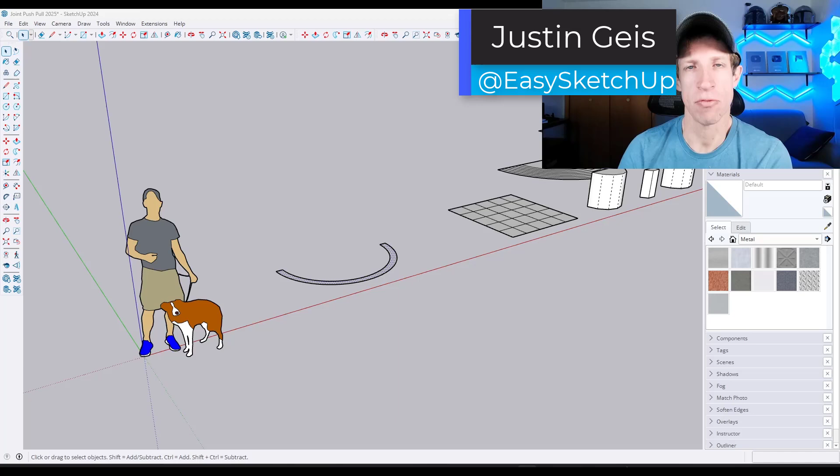In today's video we're going to talk about everything you need to know to get started with joint push-pull, the best tool for push-pulling curved and complex surfaces in SketchUp. Let's go ahead and jump into it.

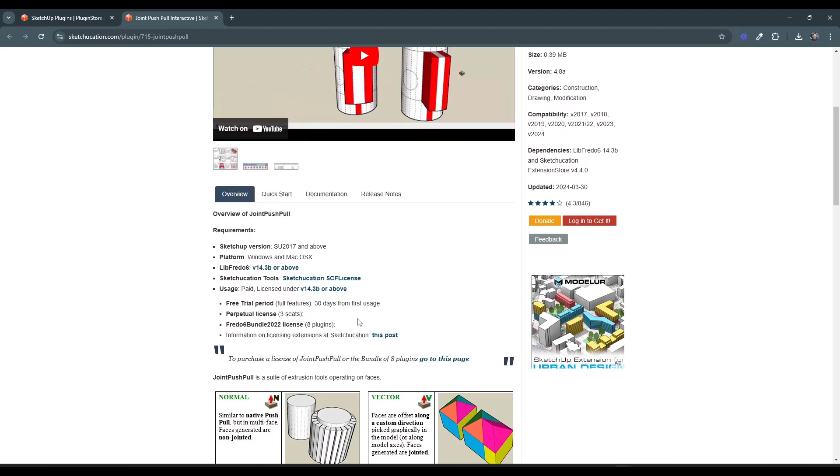You can get joint push-pull from Sketchucation, I'll link to this in the notes below. Note that we're looking for Joint Push-Pull Interactive by Fredo6. This is a paid extension now, so you can either download it individually or download it as part of Fredo6's bundle, which is usually what I recommend because the bundle gives you access to not only joint push-pull, which is great for push-pulling curved surfaces, but his other tool sets like CurveLoft, TopoShaper, Tools on Surface, which allows you to draw on complex surfaces, that kind of thing. So if you can, it's a one-time payment to download all of those. That's usually what I recommend, but you can download this one as well.

Joint push-pull is a tool for push-pulling curved surfaces. Really, when you dive into it, it's kind of a tool for push-pulling multiple surfaces as well. But let's hop over into SketchUp and take a look at the way that this works.

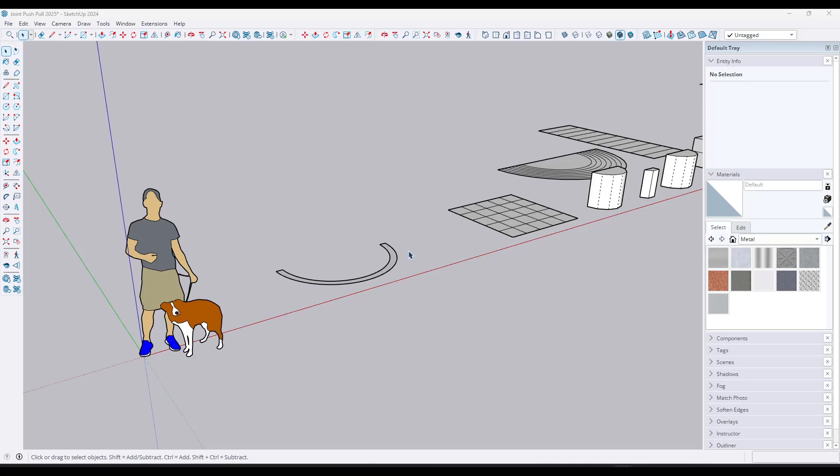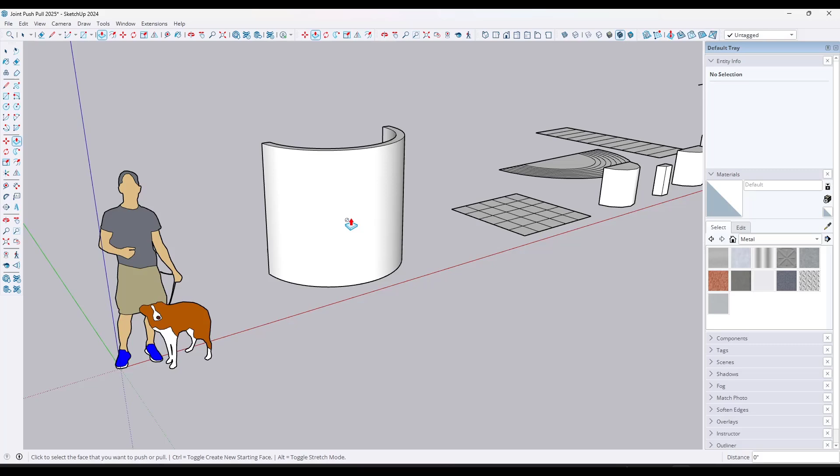First off, the reason we need joint push-pull is if you've ever had a curved surface like this one—I'm going to toggle my hidden geometry off—and tried to push-pull it, you're probably familiar with this message: cannot push-pull curved or smooth surfaces. For simple modeling that's not a big deal, but for more complex modeling, a lot of the time you do want to add thickness to more complex surfaces. That's where joint push-pull comes in.

One other thing to note: when you install one of Fredo6's extensions, you also need to make sure you've downloaded LibFredo and installed that as well. LibFredo is basically just Fredo6's library of different things that his extensions reference. You're going to need that or you'll get an error message. That one you can download for free—you don't need to pay for it.

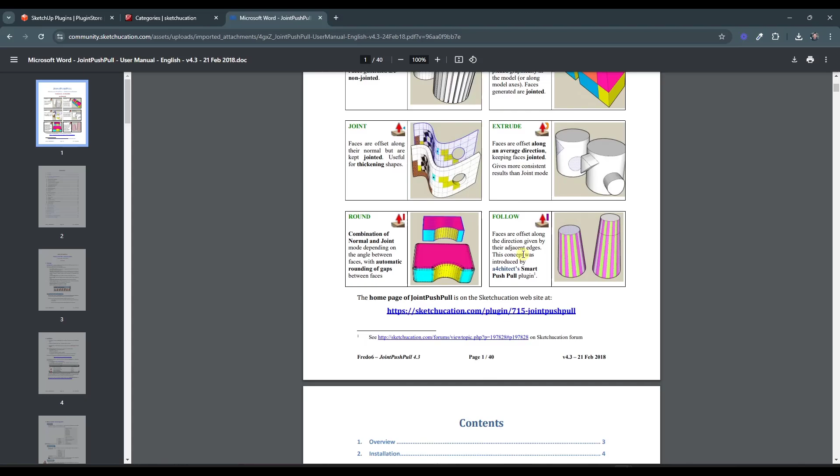From this page right here, note that there is a documentation tab, however this link doesn't really work for me. But if you go into the forum post about Joint Push-Pull Interactive, which I can link to below, there's a link in there to the documentation, right here. You can click on this link to view the newest version of the documentation. Note that this is a little outdated, but it gives you an idea of what the tools do—they haven't really changed that much since this was written.

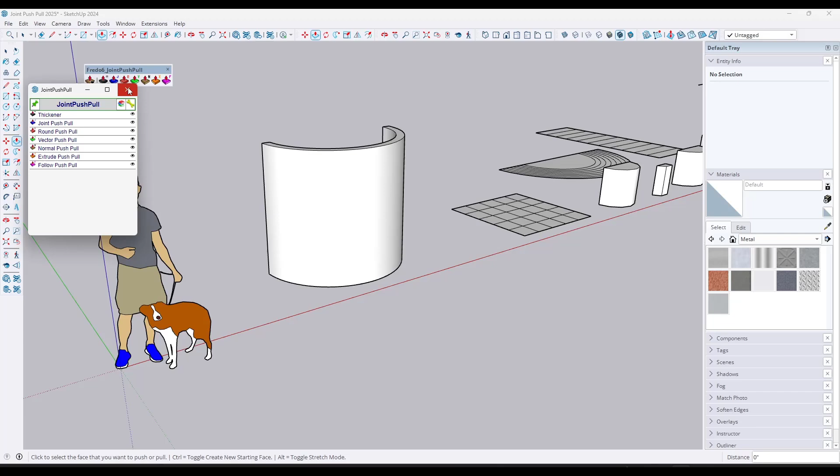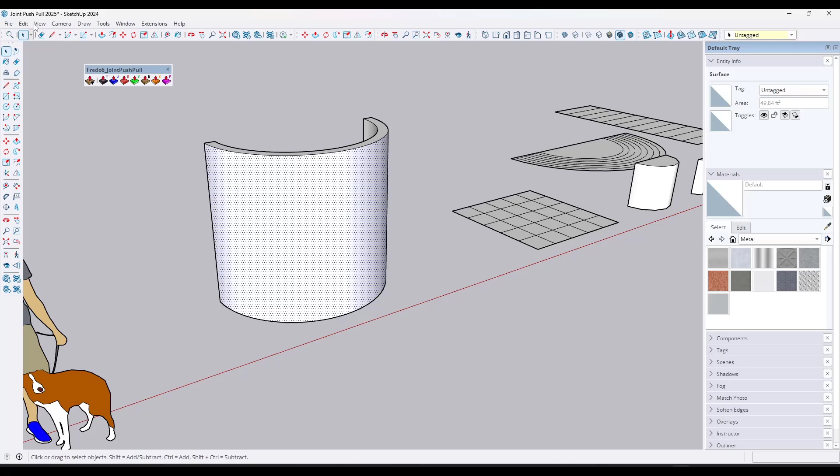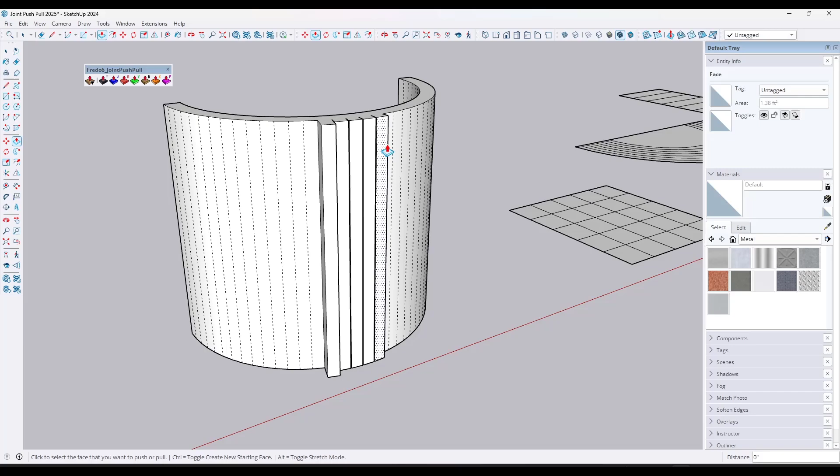In general, the point of joint push-pull is you can use it to extrude curved surfaces. If I use the joint push-pull function like this, it's going to allow you to push-pull that curved surface. Fundamentally, the reason you need an extension for this is the way SketchUp displays a surface like this is actually making up a curved surface by smoothing a bunch of flat surfaces. If you go into your hidden geometry, notice how this surface isn't actually curved—it's a bunch of singular surfaces. If we were to come in here and push-pull these individually, notice the problem is because they're all individual faces, they push-pull out and don't really merge together. So what joint push-pull does is set this up where it does automatic merging of those surfaces so that they become just a simple push-pulled surface like this.

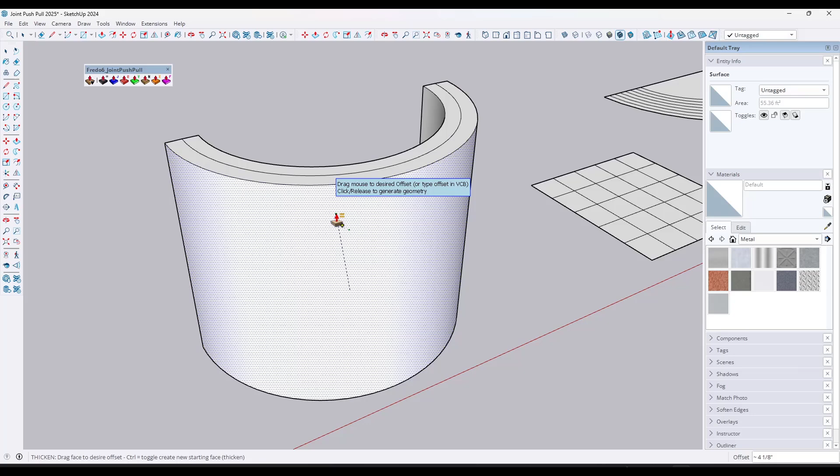Now, the first option is the thickener. All the thickener does is it's a tool designed to allow you to thicken a surface in SketchUp. It's supposed to be the simplest way to do this—it's basically just a push-pull tool that thickens a surface, that's all it does.

Notice how it's creating new surfaces right here. I don't use this one very much because a lot of the time I need to customize the way that the tool is going to work. So probably the tool that I use the most, depending on what I'm trying to do, is this first option, this blue option, which is just the simple joint push-pull.

When you click on the joint push-pull right here, notice how it's going to pop up a menu that looks like this. For you, it might start off looking different. There's a 3 arrow icon you can click on to get additional options. I pretty much always have that maximized, not minimized.

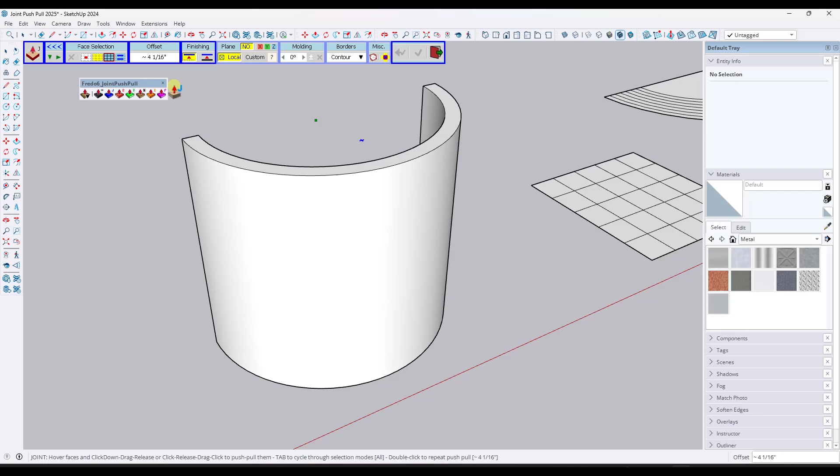There's a few different face selection options in here. I usually just leave this on surface. I don't really want this on all connected faces, because if I do, notice how it's selecting everything, and it's going to push-pull everything, which is not what I want. What I want instead is just to be able to do an individual surface like this.

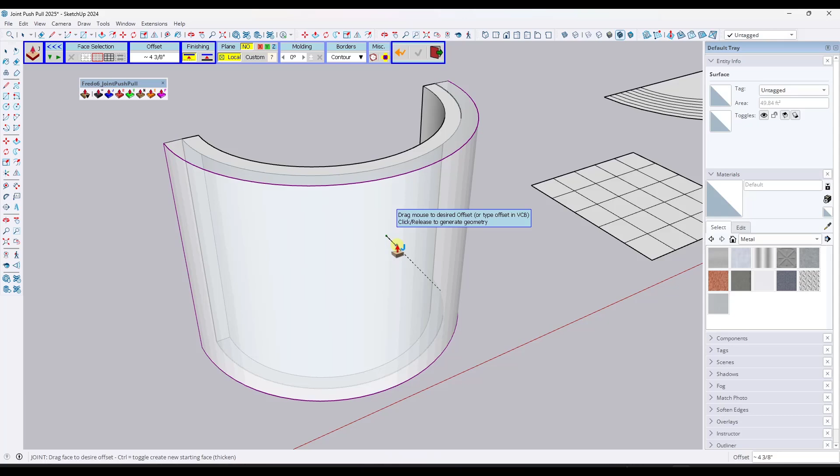When you activate this tool, notice how there's an option to, when you click on a surface, single click and move your mouse, and you can type in an offset. Or if you decide you don't like the offset you selected, if I typed in 4 inches and didn't like that, I could adjust this to like 2 inches, and notice how that's going to change on my screen.

Now, a couple other interesting things about this. First off, the finishing. What the finishing is going to do is set if it thickens this. This is a lot like tapping the control key with the regular push-pull tool. If I was to activate the thicken function, notice how it's going to thicken this surface, rather than just push-pulling the face out.

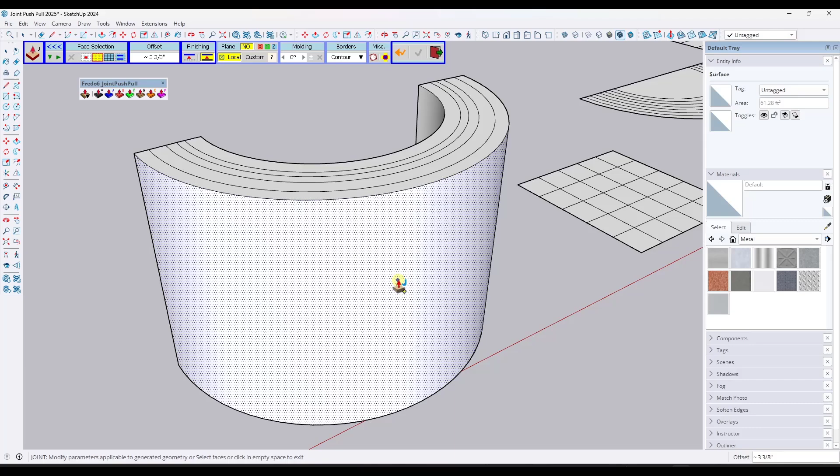If you use the thicken option, notice how it's going to create a new face from your starting point every time that you do this, just like this. So knowing the difference there can actually be extremely valuable. We're not going to worry too much about the plane on this one, we'll worry about that a little bit later.

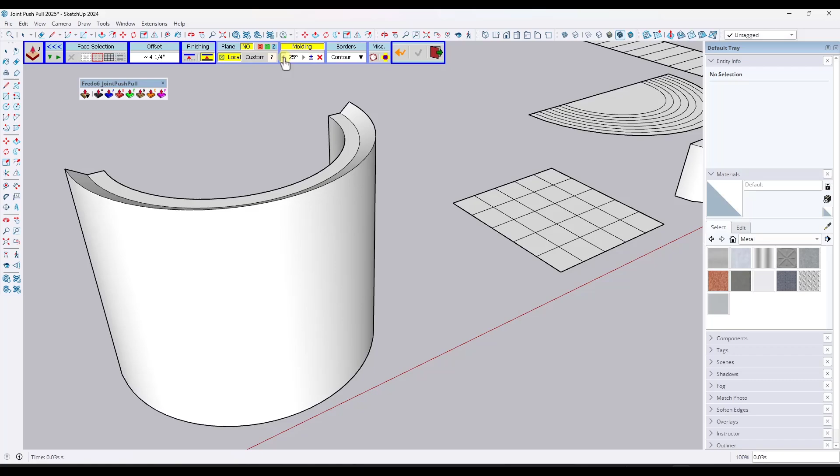Now, you do also have other options in here for things like molding. If we play with the molding, notice that's going to have this surface not only be push-pulled out, but also push-pulled at kind of an angle like this. So if you want this to be more of an angular result, you can adjust the molding here. I don't use that too much with the regular joint push-pull, but there's another tool we're going to use later where that's a big deal.

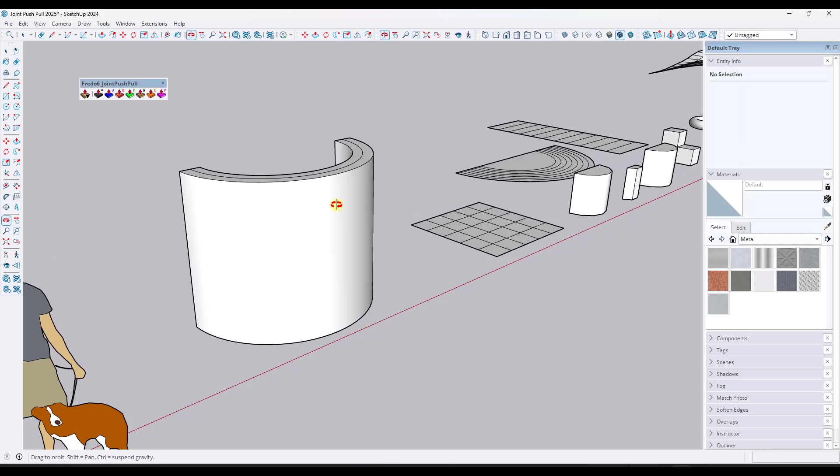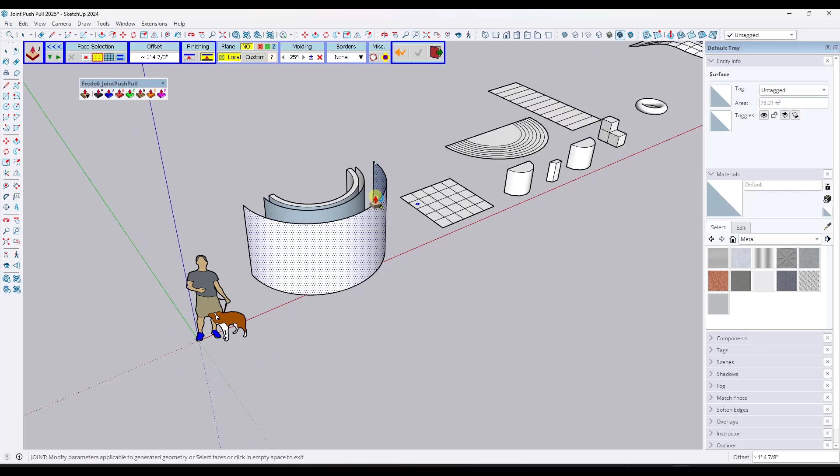So borders, there's 3 options in here. The first is none. If I set my borders to none, notice that's just going to extrude the surface, but it's not actually going to include the interior geometry in here, like this. If you set your borders to contour, it's going to do kind of a typical joint push-pull, in the sense that it's going to have faces in here, and a perimeter frame around the outside of the extrusion like this.

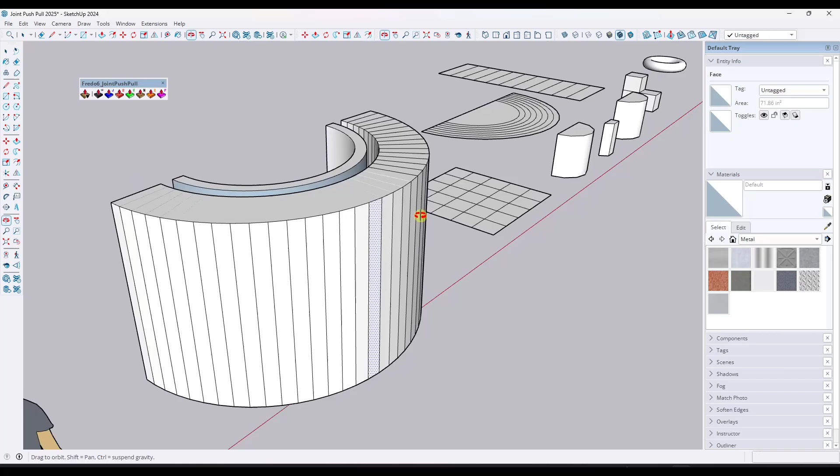Now, if you select the option for grid, notice that's going to create new geometry for every one of these right here. If we toggle X-ray mode on, notice that's literally extruding like every edge in here like this.

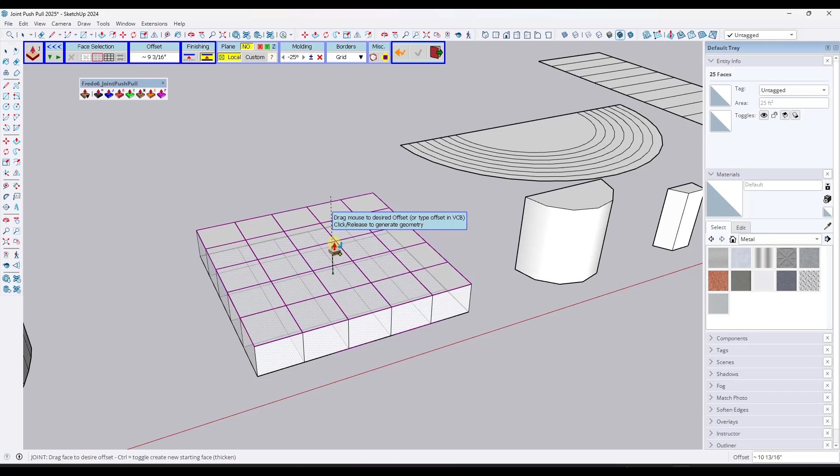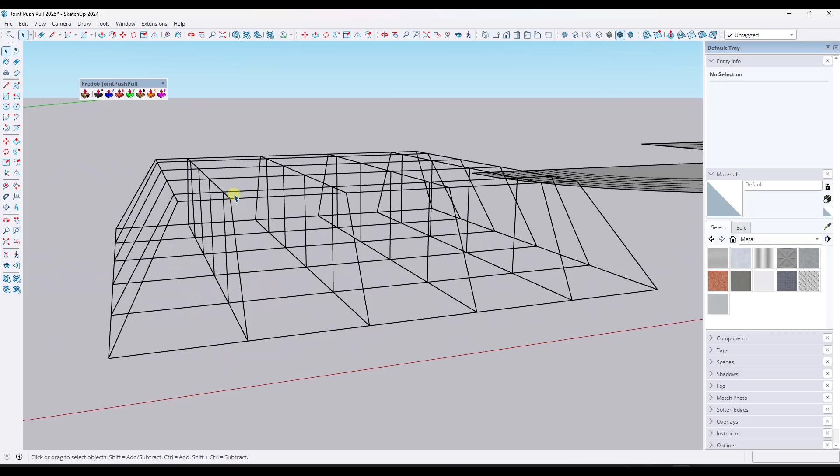Now that can be kind of interesting if you use it for things like this surface, because if I use joint push-pull right here and extrude it to a grid like this, and say we were to activate the molding, we'll do a little bit of molding right here. If I was to then select this surface, right click, use selection toys to select only the faces and delete them, notice how this created a full grid in here, which you could then use to create structural members or something like that. So you can actually use that grid function to create edges in here as well.

And then we've also got the option in here to generate your surface as a group. So I'm going to toggle my molding off right here.

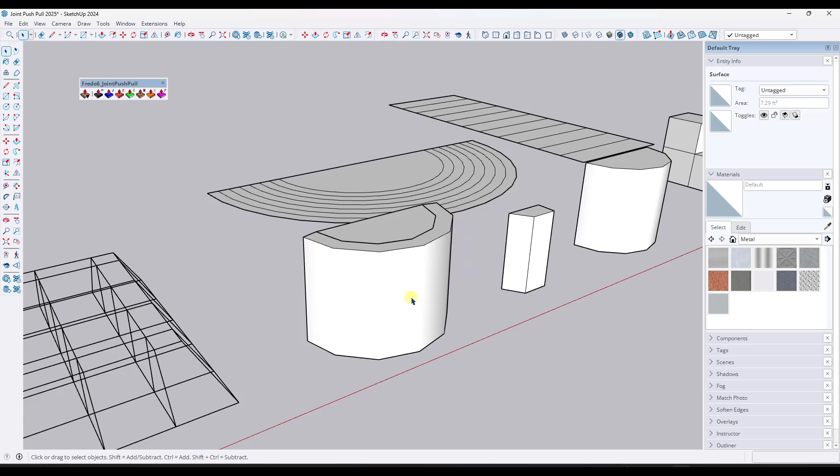But if you were to do that, what that's going to do is generate a surface, but we don't want this to be a grid, we want it to be a contour. Notice what it does is it doesn't affect your original surface. What it does is it creates that surface as a group instead, right here.

One thing to note about this tool, before I show you something cool it can do that's super helpful for things like stairs, is you can use it to select multiple different surfaces. So if I try to extrude this surface and then this surface, you could do it, but notice how it leaves you with a gap you'd have to manually fix.

Well, with joint push-pull, you can shift-click to select multiple surfaces. You can activate the tool, and I'm going to toggle this generate-as-group option off. Notice how that's going to generate the surface by stitching these surfaces together just like this. So if you want to push-pull multiple different surfaces, you can do that using this tool.

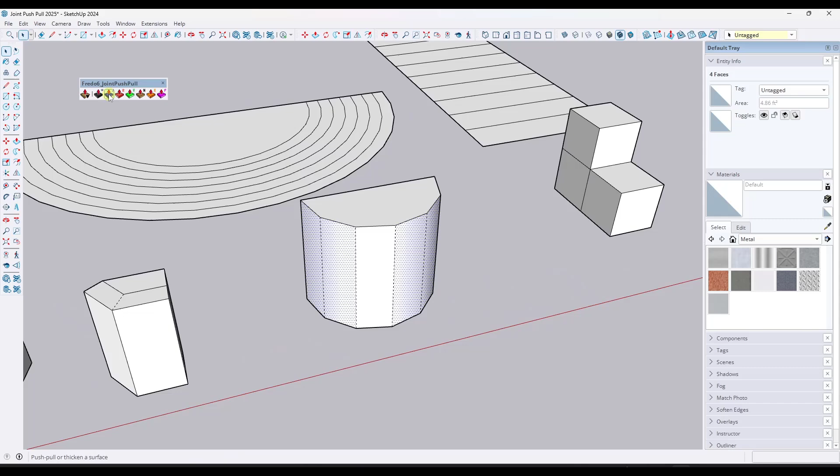So an interesting function here might be if we go into hidden geometry mode and say you only wanted to push-pull a couple of the surfaces like this, you could select all of those, and you can use this in order to push-pull multiple different surfaces at once.

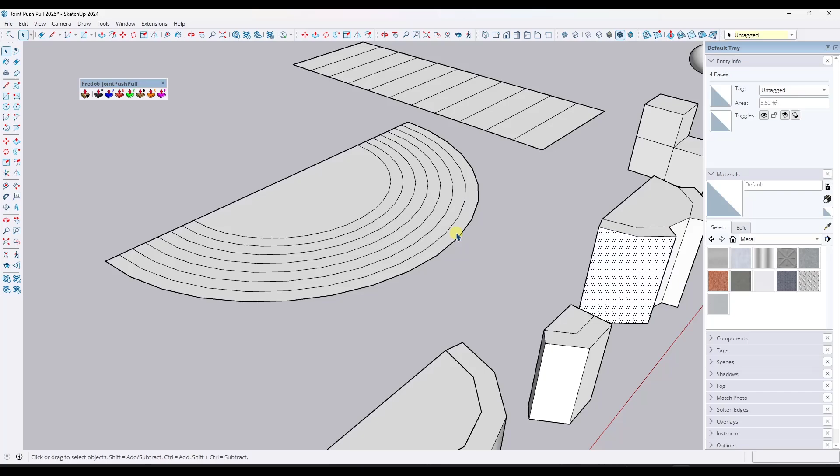Now, one function that a lot of people don't know about within this tool is the progressive push-pull function. What that means is that if you activate this tool and set an offset, I'm going to deselect everything before I do that, but I'm going to offset this face up by maybe 2 inches or something like that.

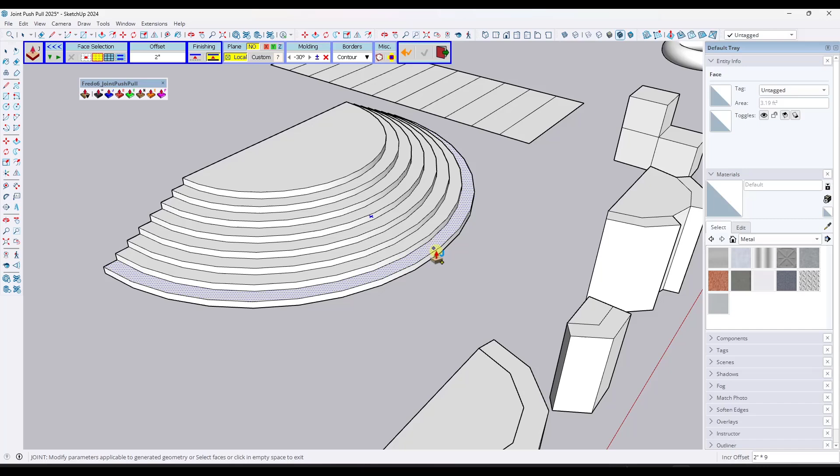Notice how now if I tap the Alt key and then click, that's going to put me in progressive push-pull mode. What that means is it's going to take that surface and push-pull it the amount that it push-pulled the last one, but then multiply that by 2. So this one got push-pulled twice as much, this one 3 times as much, and so on, which allows you to really quickly create things like stairs.

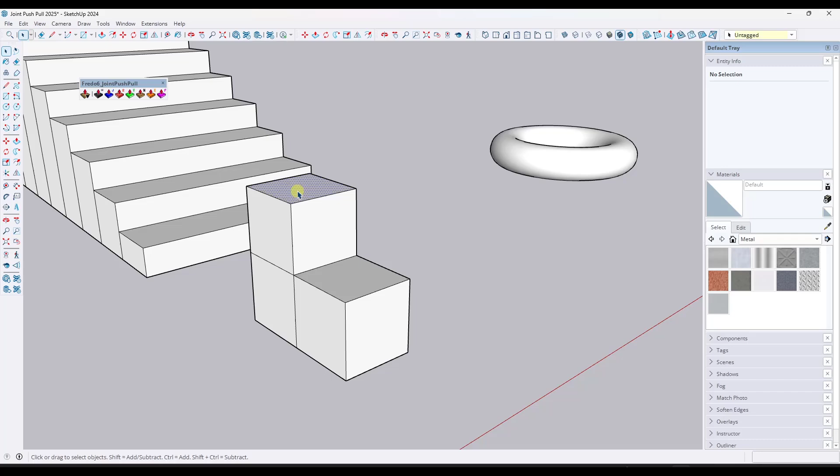So next up we've got a tool I don't really use all that much, the round push-pull. I prefer using Fredo6's Fredo Corner tool instead. But basically what it does is it push-pulls surfaces and then rounds them. For example, if I select these surfaces and extrude this out, notice on these external corners it's creating this kind of curve.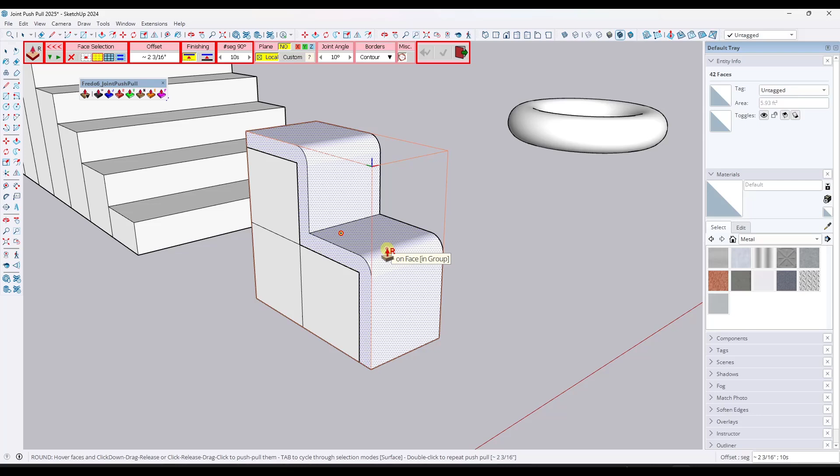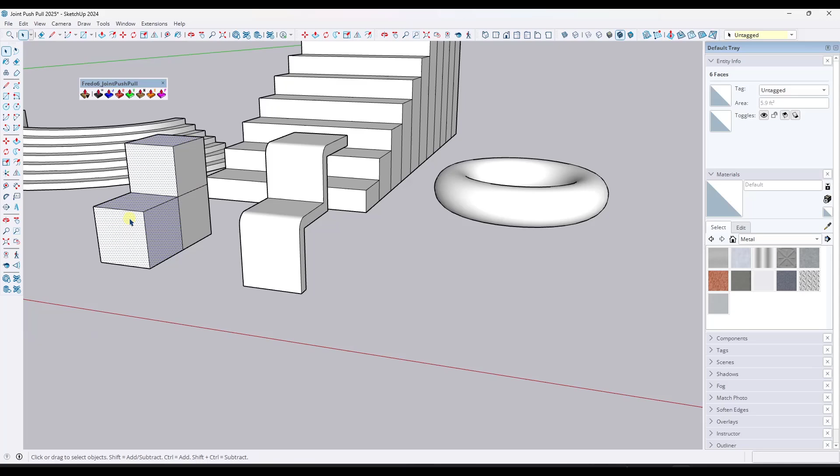And notice how I set this to be placed in a group, just so I can move it off to the side to see the different results. That's basically what this tool is good for, creating those curves on external faces. So say we were to select all of these right here - round push-pull is going to round off all those exterior corners.

And then there's things you can adjust here, like you can set the angle at which it's going to create the rounding, as well as the number of segments in the rounding. You can see this right here. If I go into hidden geometry, you can see it a little better, but that's going to adjust the number of segments created.

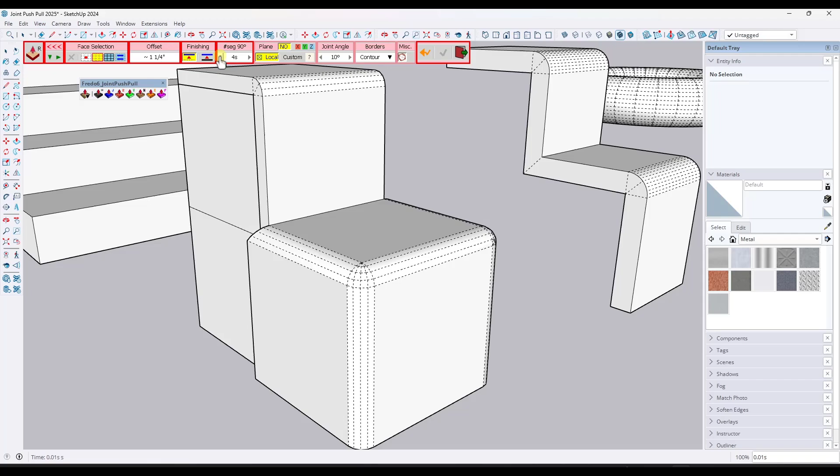Now, I don't really use this one all that much. I prefer using Fredo Corner or something like that, mostly because you get a bit more control over the joints that are created, but it is in here. So next up we have a tool that's really interesting to me, the vector push-pull.

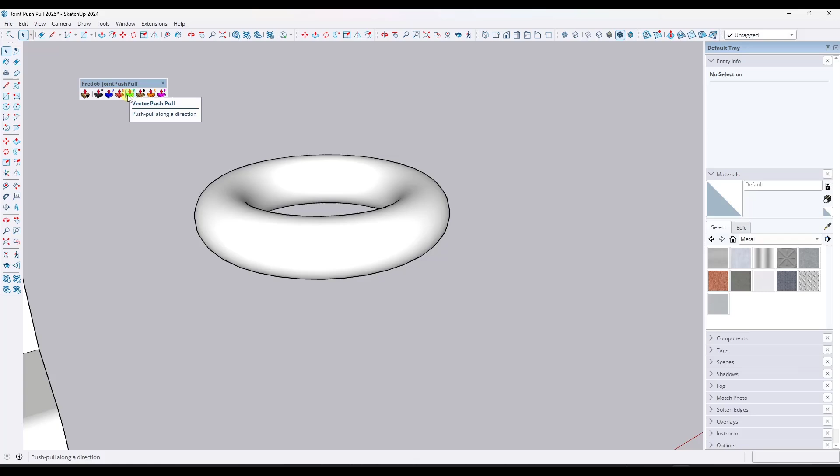Up to this point, what we've been doing is using joint push-pull, which push-pulls all the surfaces based on the surface direction, and then creates a surface like this. That allows you to select different things and push-pull them in a certain direction. So say, for example, that I was to select just a bunch of the faces on this side right here.

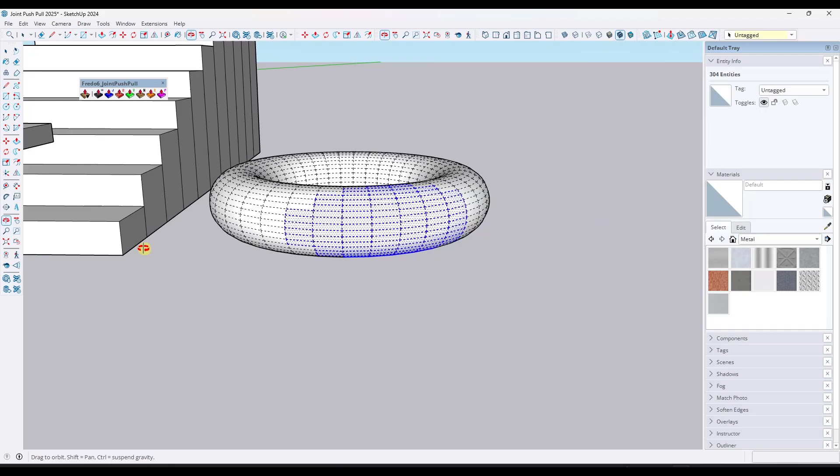Notice how instead of push-pulling them out, I can set if it goes on the Z, X, or Y direction like this, and you can tap the arrow keys in order to do that. But notice how I can take all of them, and instead of just thickening those, I can push-pull them or extrude them in a direction like this.

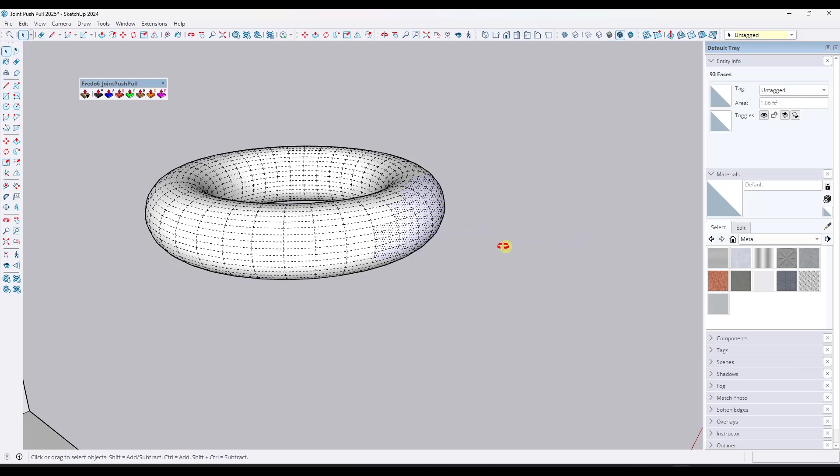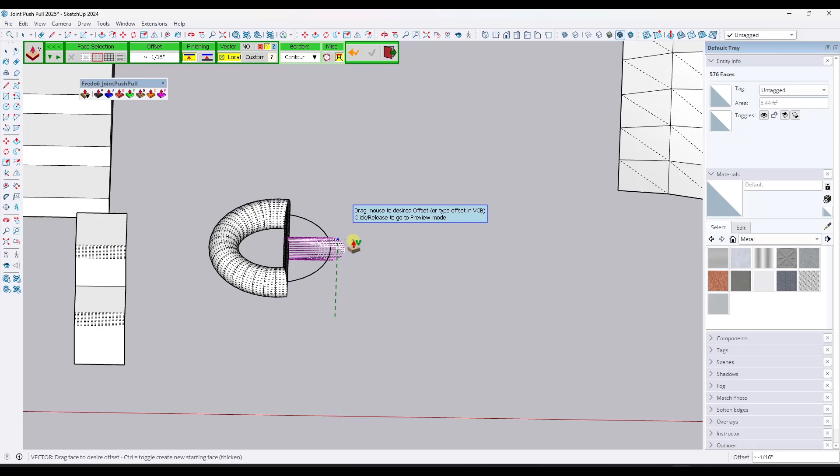Now where this gets interesting is you also have the ability, and I'm going to go to a parallel projection mode, to flatten those. I really like that function, because if you click the right arrow and then click flatten, it's going to flatten that geometry in a certain direction. It extrudes it out and then makes it flat.

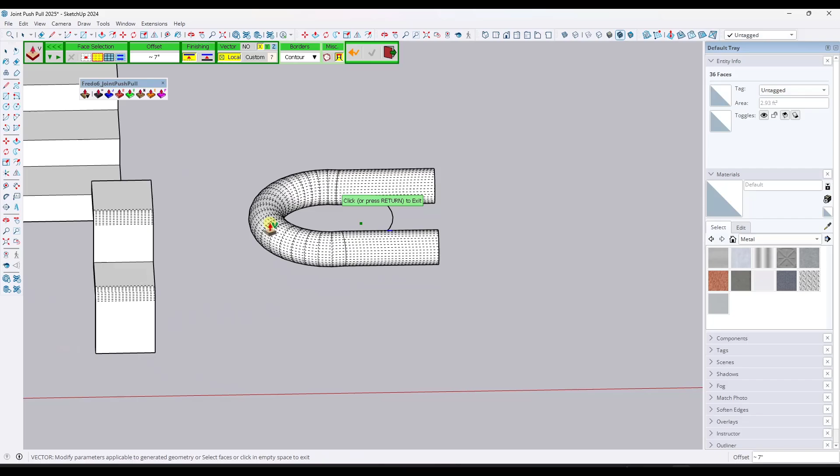In this case we've got a bunch of additional geometry in here, which you could then erase out. This all appears to be selected, so I can just hit the delete key. But that lets you take certain things and push-pull them in a direction.

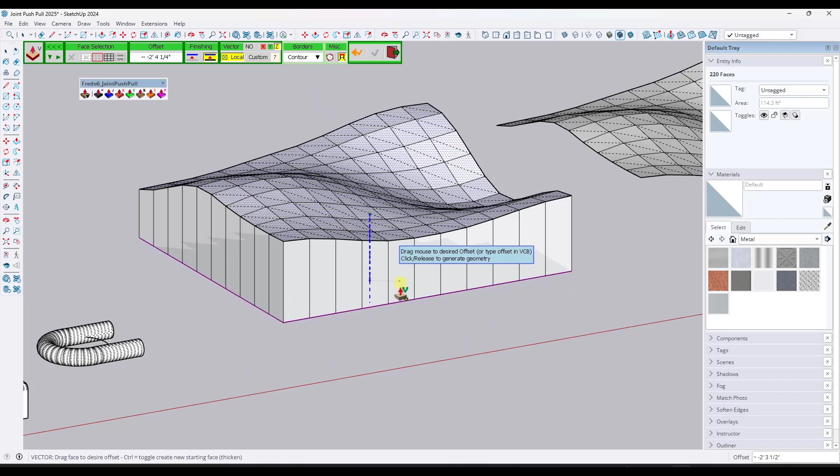Now that's really interesting for creating solids of surfaces. So if I have terrains or something like that, I use this a lot in the Z direction in order to create a surface. Notice how you probably want this to be in the thicken mode right here, so it keeps the original face. Notice how I can extrude this down, and now I've created a solid group in here that I can then slice or do a lot of different things with. So I use this to create solids like this a lot of the time in SketchUp, and it's super powerful.

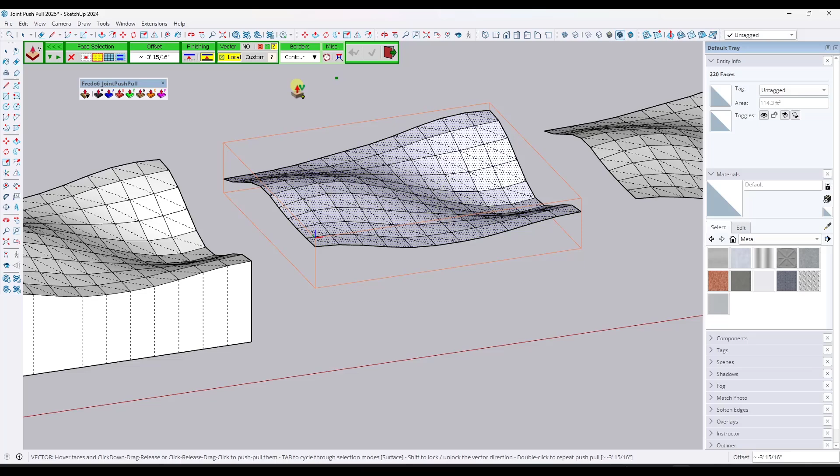Now one thing to note is for a surface like this one, if you don't want to flatten it, you can just leave it like this and thicken it. When you thicken it, that's going to make the surface thicker, but you can dictate that it goes straight up and down.

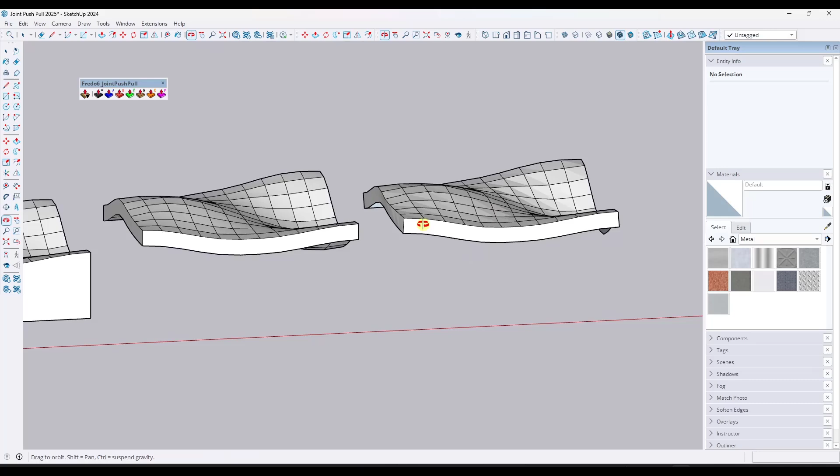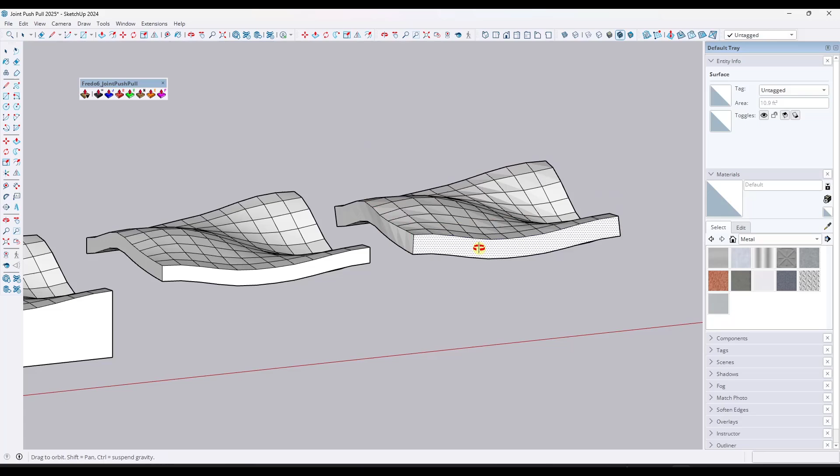For example, if you were to try to do this, and I'm going to toggle my hidden geometry off, with the joint push-pull, what happens is it'll do it, but notice how you get this kind of crazy in and out a little bit because it's basically push-pulling based on all the face directions. So I probably want to set it, I'm just going to tap Control in order to put it in the other mode. This is a little bit crazier of a shape than this one because these were extruded straight up and down, so notice how it gives you a slightly better result.

So anytime I want to thicken something straight up and down in a direction, I use this vector push-pull.

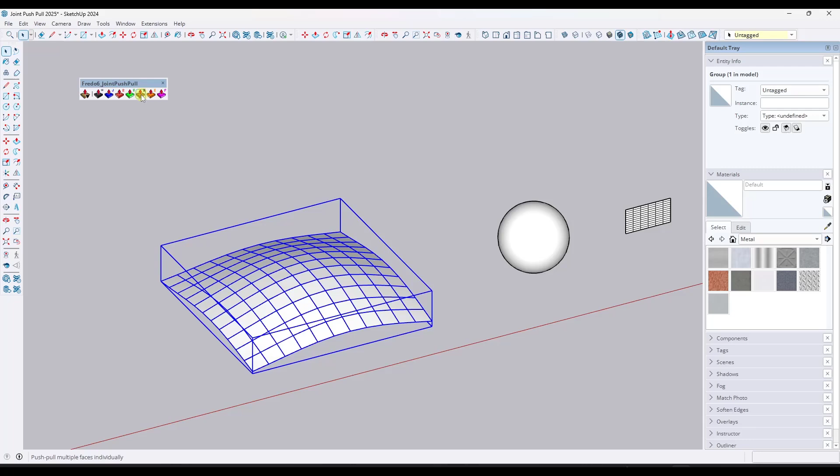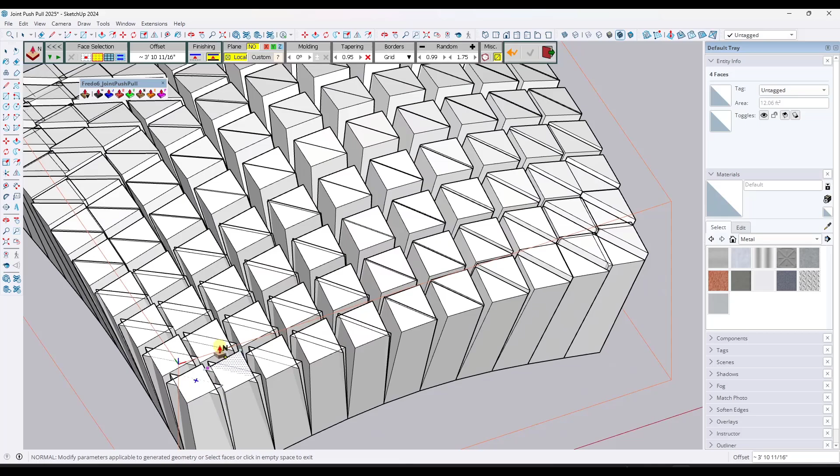Next up, we have a tool that I think is misunderstood and I actually really enjoy, called the normal push-pull. You have to have a little bit of understanding of the way topology works in SketchUp and how faces are displayed, but normal push-pull is going to push-pull individual faces based on their directions. There's a bunch of options in here which we'll look at in a second, but basically if we do this, it's kind of like extruding everything the way we talked about before, all of those faces at once, but it's not healing this in, which can give you really interesting results. Now we've got a little bit of an overlap because those are more like triangulated faces, but it gives you an idea of what it's capable of.

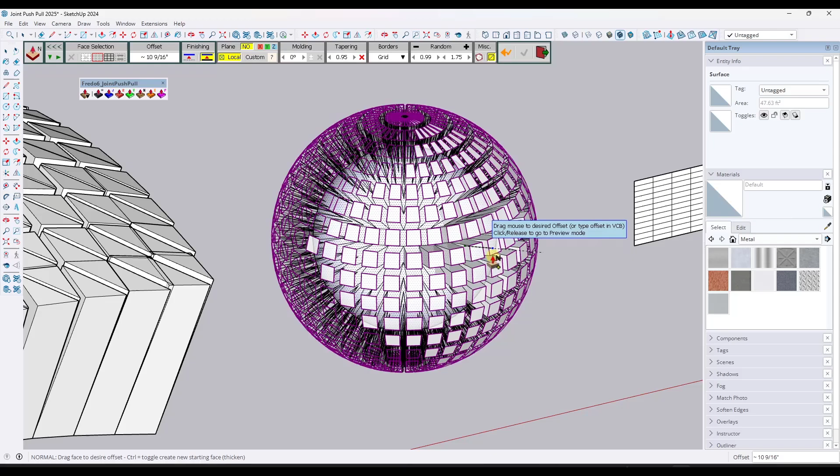So say, for example, that I was to select the sphere and use normal push-pull, it's going to push-pull every one of those faces in the direction that those faces are facing, and it's not going to heal this in. That's really interesting if you want to select individual faces or something like that. So say we were to pick up a few of these faces and use normal push-pull, notice how we can use this in order to extrude those all out in whatever direction they're facing.

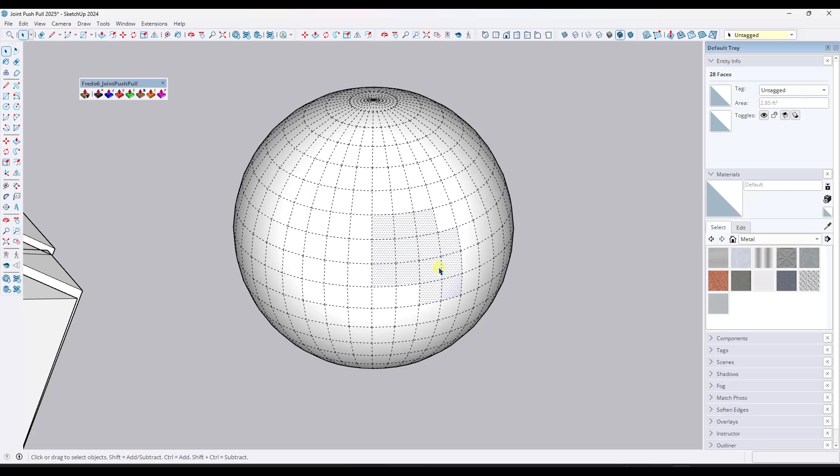Now that by itself is not especially helpful, but where this is actually powerful is not with surfaces like this one, it's with surfaces like these. The reason why is, say that I wanted to create a pile of lumber in here, I could use normal push-pull in order to push-pull all of those at once. And what I'm going to do is set this so that it generates those as a group.

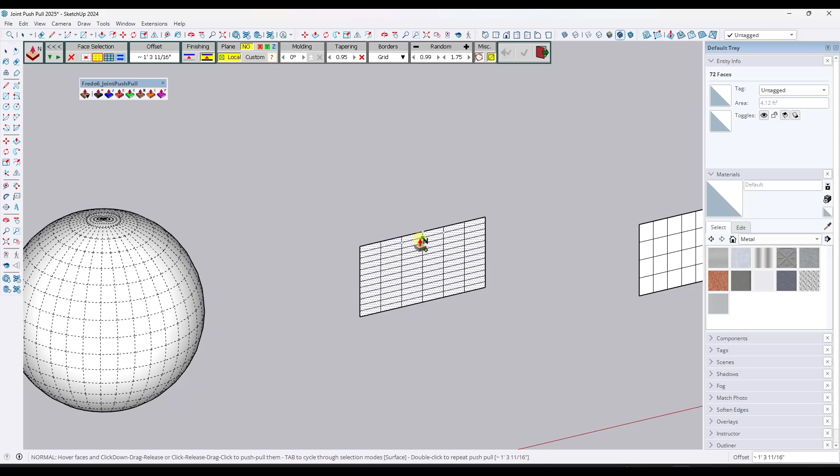Say I've got a pile of lumber right here. I'm just going to push-pull this to 8 feet, or negative 8 feet, like that. What that's going to do is extrude every one of these.

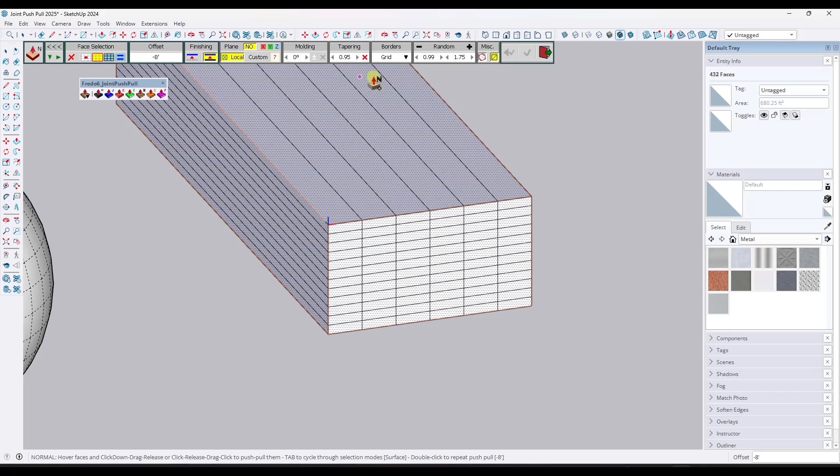If you select the option for borders grid like this, notice how if I go into X-ray mode, this extrudes every single one of these individually, not as an individual object, but it keeps all of that geometry in here.

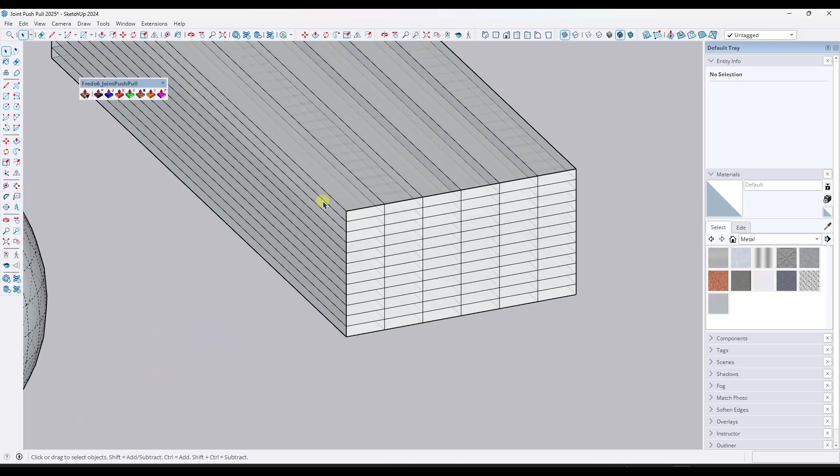The only downside to this, and something you might do with components instead, is that it generates them all as a bunch of raw geometry in a group, so it doesn't generate the individual boards. But it's not really a big deal for what we're trying to do right here.

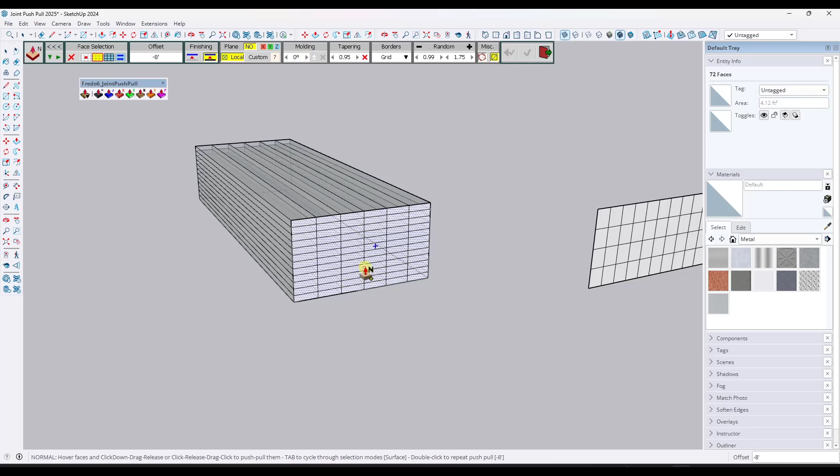Another cool thing about this function is it has some things people don't know about: randomization, tapering, and molding. We're not going to worry too much about molding, but say I was to take these surfaces right here and push-pull them, well, that's not very interesting.

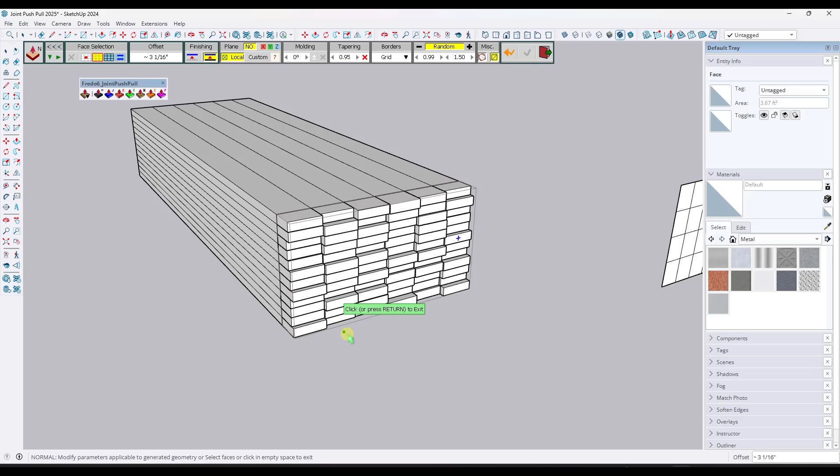But if I toggle my X-ray mode off and toggle randomization on, you can set randomization of the extrusions like this. You could use this to create random board faces and other things like that. There's a little bit of geometry in here you'd have to clean up, but being able to randomly extrude a bunch of things at once is actually super valuable.

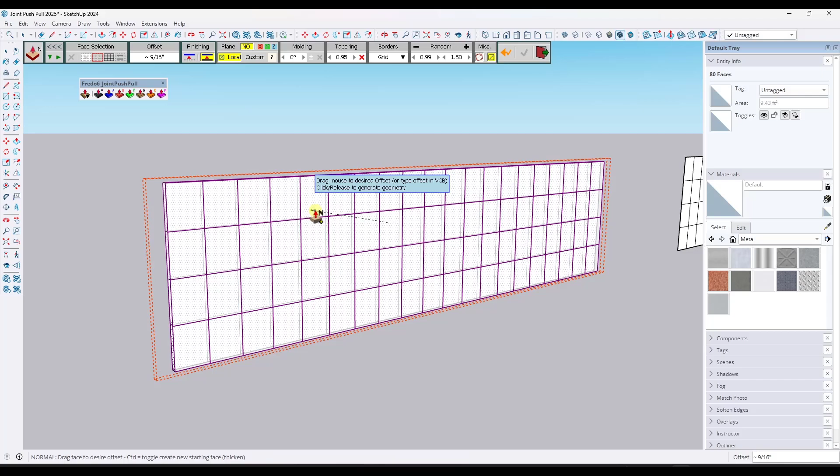Now, one other thing people don't really think about with this, and you wouldn't always do this, but say you had a tile wall. I'm just going to extrude this by a little bit. In this case we don't want to randomize it, right? So if we extrude a tile wall out by, call it 1/8 of an inch, that's not super interesting, because there's no gaps in here.

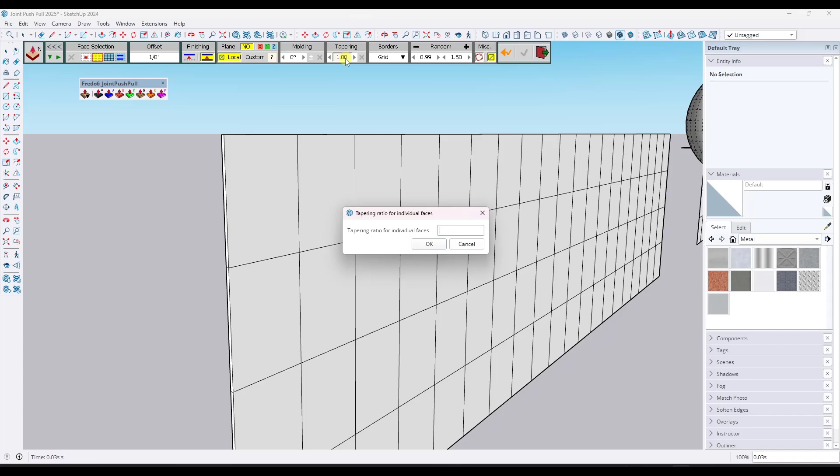But there's an option in here for tapering. If you set tapering, you can set every object so that it tapers by a little bit. If I type in 0.95 right here, I could use this to really quickly taper all of these different surfaces in order to create individual tiles or something like that. So if you're taking this to a rendering program and you need gaps in here, this is a great way to do that.

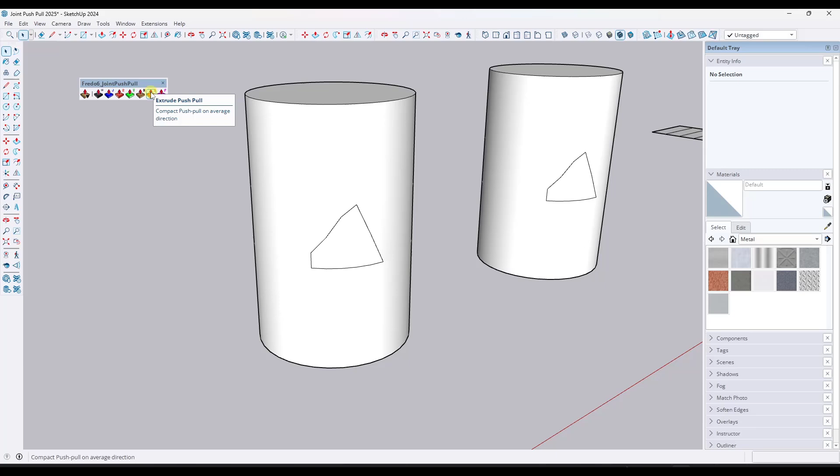Okay, so these next two tools I very rarely use. I don't think I've ever actually used the follow push pull tool. The extrude push pull tool kind of makes sense for one kind of application, which is if you joint push pull a surface like this one.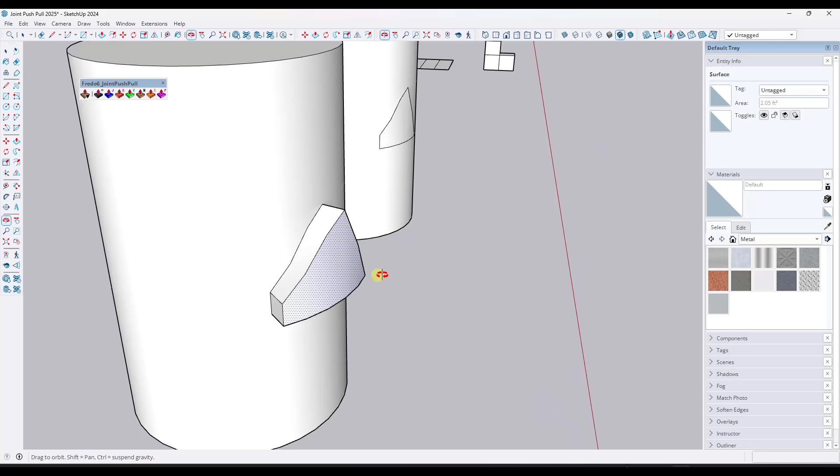So I'm just going to joint push pull this out. Notice how you get kind of an odd result in the sense that everything is non-uniform, and it creates distortion to the object. You can see that distortion right here for this object on this surface. Well, you can use this function to do that a little more cleanly.

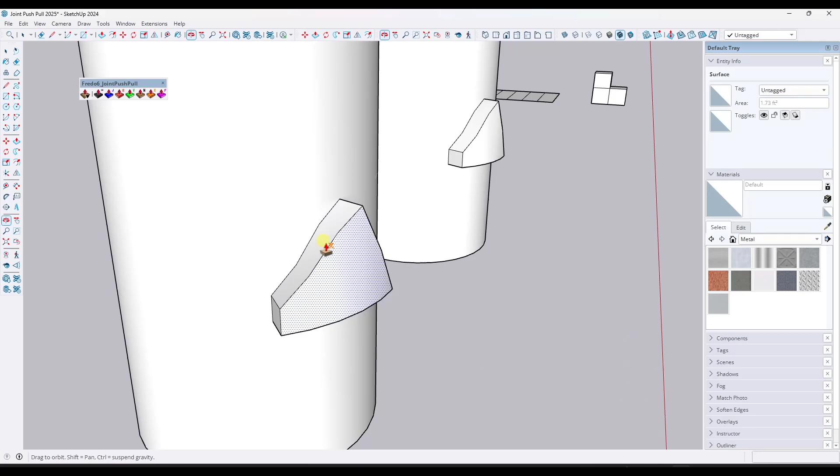Notice how this one, for example, maintains the same orientation that's over here, so this one gets a little bit more distorted. You can see that, it's kind of in a weird direction, while this one is a lot more uniform in the way it creates that geometry. You can use this one to do things like flatten the surfaces as well, which is kind of interesting, but this is what I use this one for.

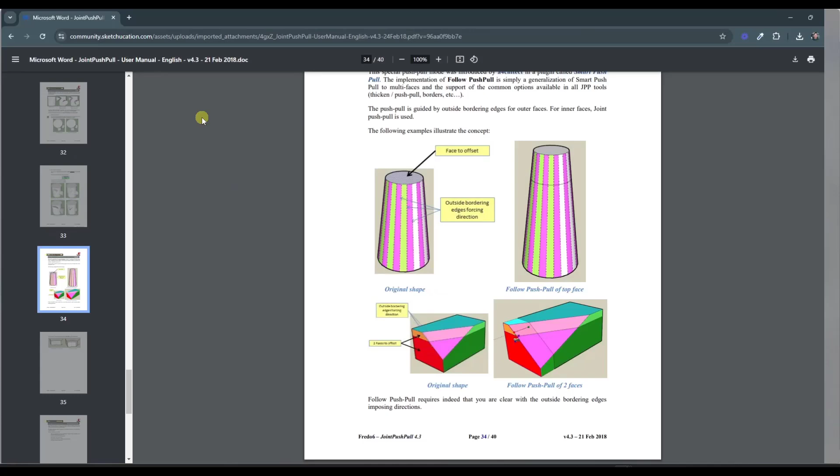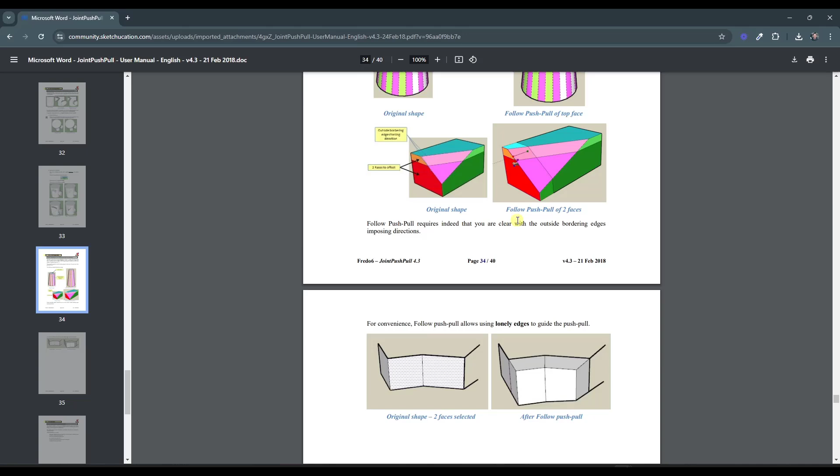Honestly, I do not understand what the follow push pull tool is for. My understanding is that it's guided by the outside bordering edges. So if you ever have something like this piece right here that's cut off and has a taper to it, what it's doing is push pulling this face out, but it continues the taper right here. I've never really actually used this for anything. If I ever do, I'll do a standalone video on it, but it is an interesting function.

All right, so that's kind of an overview of joint push pull. If you have any specific questions or use cases, I'd love to hear about them in the comments down below.